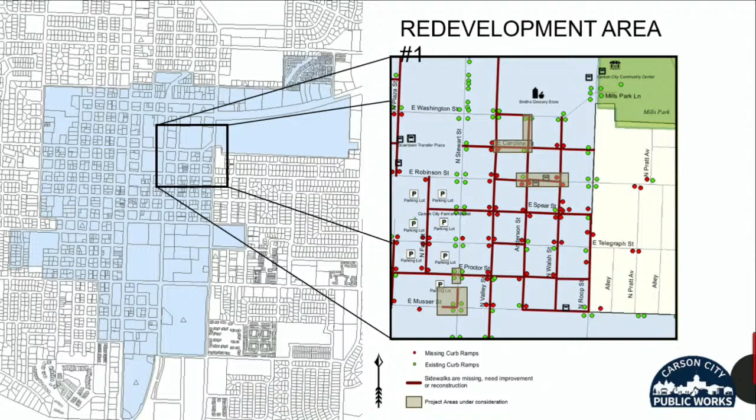On this graphic showing the streets in the downtown area, pretty much the Stewart Telegraph area, red dots are missing curb ramps, green are existing curb ramps but not necessarily ADA compliant, and red shows sidewalks observed to be missing or needing improvement or reconstruction. There's a lot of red, and that's what we're working on: reconstructing and adding facilities to add connections to community services in this area. The grayish brown boxes highlight the project areas under consideration, and we'll zoom into each of those in this presentation.

Starting here at the northwest corner of East Musser and North Stewart Street, you see the existing condition: a deteriorated sidewalk, curb and gutter, non-ADA compliant, with grade slopes some exceeding 10%. ADA compliance requires 1.5% to 2% for sidewalks, so this is not pedestrian friendly for all users.

On the proposed design side, these civil 3D renderings show what the improvements will look like: flattened sidewalks that are ADA compliant, a ramp into the Mangia Tutto restaurant, a type 1 drive access exit that complies for pedestrians and wheelchair access, and a landscape buffer to collect roof drainage into the curb and gutter. There's also retaining curb to adjust grades to the patio at Mangia Tutto — lots of little improvements to make this retrofit work.

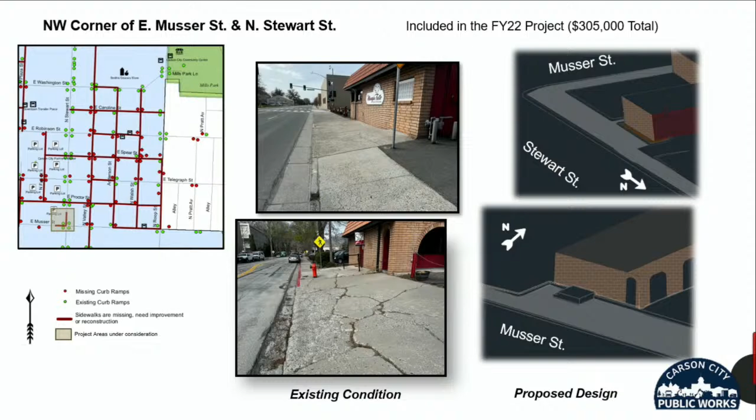The next area included in this fiscal year 22 project is Anderson Street between East Caroline and East Washington Street. In the existing condition there's a deteriorated valley gutter, no curb ramp, and no sidewalk connecting to Smith's grocery store. We'll be adding a new curb ramp and sidewalk, an important connection for residents to get up to that grocery store.

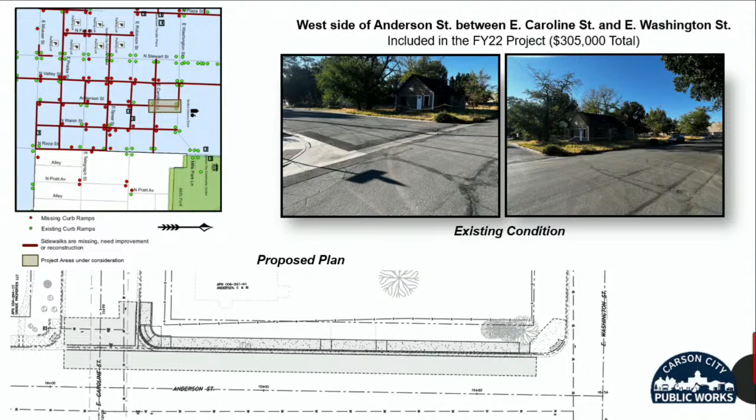We have a few items here we're calling bid alternates. This fiscal year 22 project is currently out to bid, and the last two areas I showed are the main portions — our base bid. These bid alternate areas are ones we hope to construct and have design and construction plans for, but depending on what the construction bids come back to be, they may or may not get constructed this fiscal year.

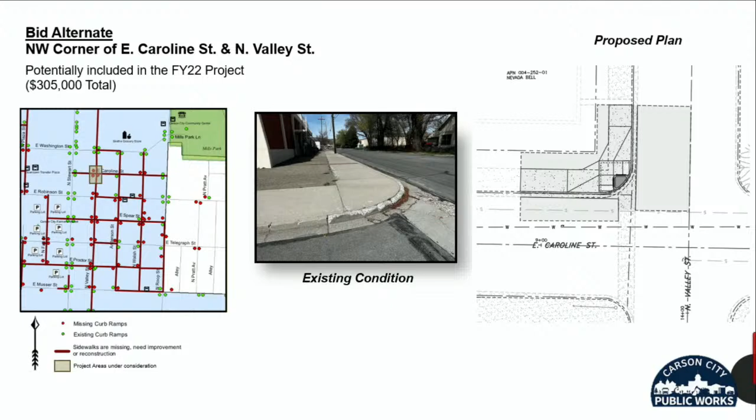The first bid alternate is on the northwest corner of East Caroline and North Valley Street. You'll see no curb ramps, a deteriorated valley gutter, and sidewalks in rough condition. This is also a very important connection between these hotels and residences and Smith's grocery store, so we'll be putting in linear ramps and a nice connection that will be much more pedestrian friendly.

The last bid alternate for fiscal year 22 is the west side of the North Stewart and East Proctor intersection, just north of the Mangia Tutto restaurant. These ramps are non-ADA compliant, with valley gutters in rough shape and steep slopes. We're looking at putting in ramps that allow connectivity with the crosswalk on North Stewart, as well as continuing that accessibility.

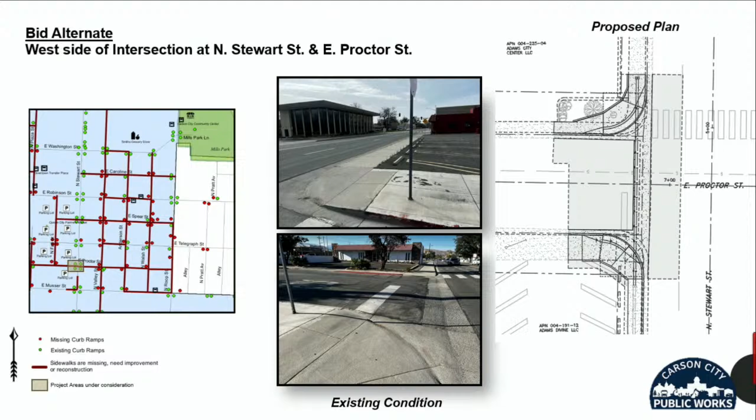That fills out our fiscal year 22 projects. Looking forward at fiscal year 23 money, as Randy mentioned, we're proceeding with an FTA grant of $180,000 for areas with connectivity to bus stops. With the two bus stops on East Robinson Street, we're going to be doing lots of curb ramps, sidewalk connections, and bus stop improvements.

We'll have $180,000 for that FTA grant with a 20% match we'd like to use RACC funds for. We'll have an extra $155,000 left over, so we'd like to include sidewalk and ramp improvements for East Caroline Street to the north, along with any fiscal year 22 alternates that weren't able to be constructed. We'll see how that plays out as the bid opening happens soon.

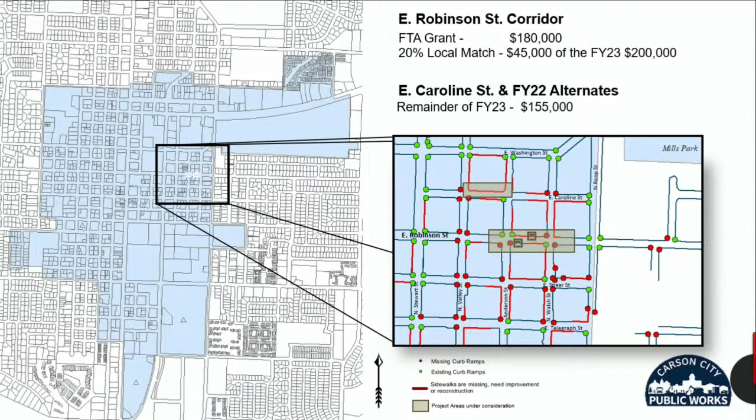Moving on to redevelopment area number 2. This is, as Randy mentioned, a CDBG project that the city received funding for. There was a budget shortfall, and it was decided to be a good use of funds for RACC to contribute to this project. Unfortunately, due to supply chain shortages and the construction environment, we were unable to construct this project last year.

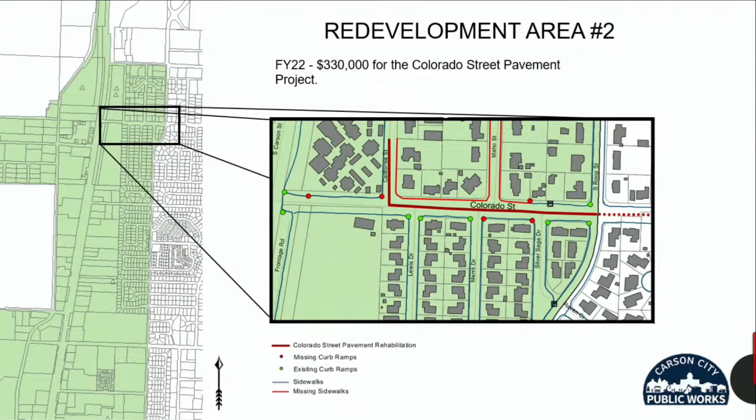A little summary here, next steps. So the fiscal year 22 project, construction is expected to begin this fall. We do have it out to bid. We are hoping that we receive favorable bid prices, but we'll find out soon. The fiscal year 23 project is in design, and construction is expected for summer 23.

For redevelopment area 2, that's the Colorado Street pavement project. That project, as I mentioned, is being rebid, with construction hopefully in spring 23. So Randy, do you have anything else to add? No, I think great job.

I just wanted to mention bid alternates. If you're not familiar with how they work, I'll briefly discuss it, because we threw that term out there and I'm not sure if everyone's familiar. We're having a hard time right now with the way construction's going, estimating prices as well as we used to. We used to have it down to probably the closest dollar, and we'd be able to tell you exactly how many lineal feet or square feet of something we could lay out. That's become very challenging lately, and we're hoping it's normalizing soon, but it's still in flux.

So what a bid alternate allows us to do is design something and put it out to bid, but tell the contractor that it's price dependent. So if they don't give us favorable prices, then that would not be included in their awarded work. Essentially what we're trying to do is include as much of the design and construction work as we can with the money that we have, without letting any money fall left on the table.

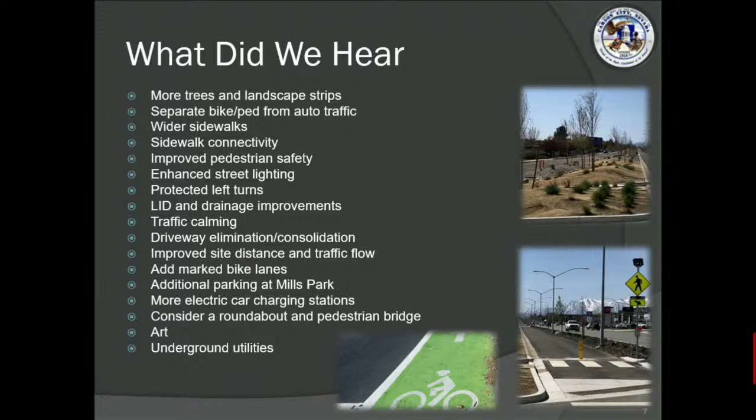I am the project manager for the design consultant helping the city deliver this important project. I'm going to talk through the steps we went through to get a preferred alternative for the corridor. We developed a feasibility study, investigated the existing conditions, developed and evaluated alternatives, and that led us to the preferred alternative for the corridor.

Randy touched on the project goals a little earlier. For existing conditions, we needed to consider the existing right-of-way width, as well as the existing features out there now. There's a lot of multi-use paths and sidewalks today that we're hoping we can connect to, as well as lighting and the travel patterns of both pedestrians and auto. We also considered public feedback and traffic operations.

A traffic report was prepared, which I'm going to talk about in more detail later. And then the city's existing plans and policies, such as the 2050 Regional Transportation Plan, the General Master Plan, the Unified Pathways Master Plan, and more.

So what we did was break the corridor into four segments: North Carson to Stewart, Stewart to Roop, Roop to Saliman, and Saliman to I-580. The reason we did that is the corridor really transforms from west to east - it's hard to do one size fits all through the corridor. The speeds increase, the volume increases, the width increases as you get closer to the freeway.

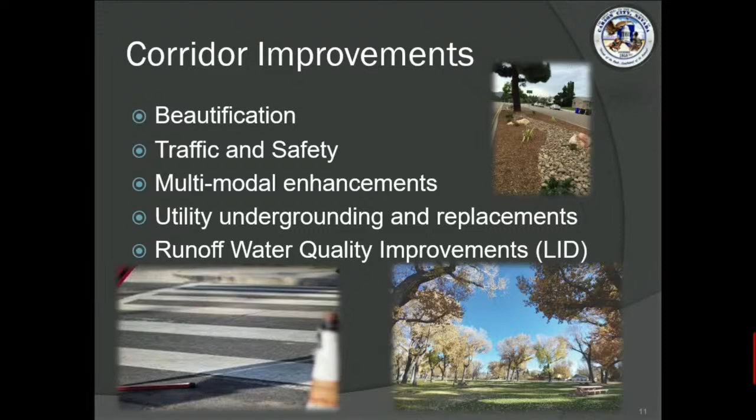So the preferred alternative throughout the whole corridor includes beautification, traffic and safety improvements, multimodal enhancements, as Randy mentioned, utility undergrounding and replacements. That's not just because they're unsightly, but because many of the poles are blocking the sidewalks, and it'll be very difficult to get our ADA clearance without removing the poles. And then runoff water quality improvements will be installed within the landscape areas.

This shows the preferred alternative from North Carson to Roop Street, and this is looking east towards I-580. You'll see our walking figure - not called a walkie guy, walkie dude - basically the guy walking east down the road to show the direction our cross sections are in.

From North Carson to Stewart Street, we are going to have dedicated bicycle lanes in each direction, as well as a wide sidewalk separated from the road with a wide landscape strip. You also see on this map potential bus stop locations. The Jump Around Carson Transit line is going to be expanded through here - eastbound will potentially go from Carson to I-580, and westbound from I-580 to North Roop Street. We've identified locations and will be working closely with the city's transit department and planning department to identify where those stops are going to go.

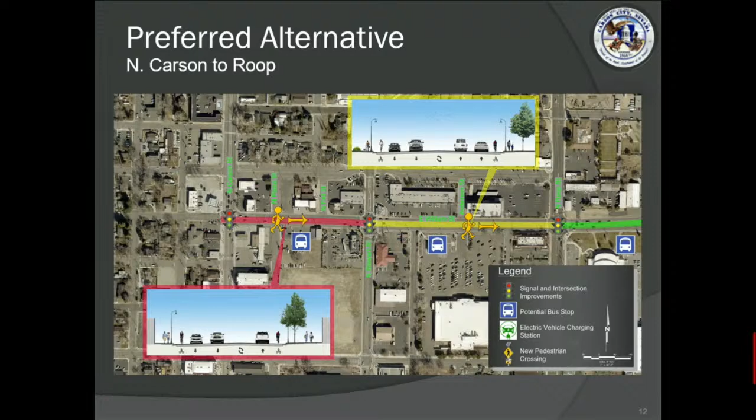Between Stewart and Roop Street, we also have dedicated bicycle lanes, as well as sidewalks and landscape area. This is actually the most constrained area in the corridor - it's got the smallest amount of right-of-way, plus some buildings that are pretty close to the edge of the road. So we won't be able to get as large of a landscape strip as between Carson and Stewart Street, but we're going to maintain existing landscaping where we can, and enhance where we have room.

From Roop to Saliman, the roadway gets much larger. In this area, we're able to put in a buffered bike lane, which means we can have a 3-foot separation between the cars and the bikes. That's been shown to provide a better experience, not only for bicyclists, but for automobiles as well.

This cross-section is at Mills Park, where we're going to be enhancing the parking that's there for Mills Park, as well as adding electric vehicle charging stations in this area, and landscaping wherever we can.

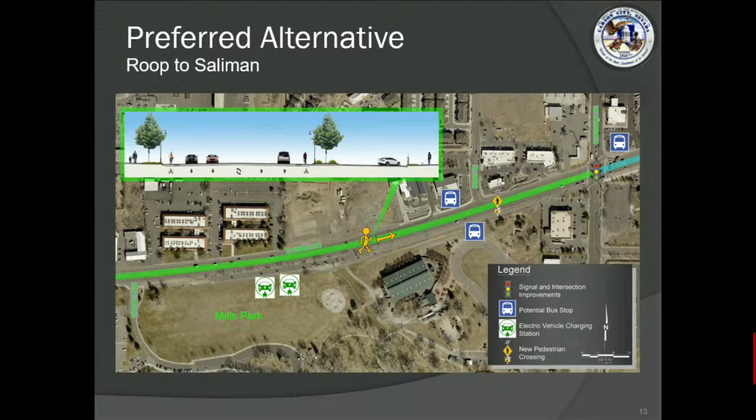From Saliman to Gold Dust West, we also have enough room to put in the buffered bicycle lanes, as well as landscape area, which is going to separate the multi-use paths and sidewalks from the travelway, which is more comfortable for pedestrians when you can be separated from the travel lanes.

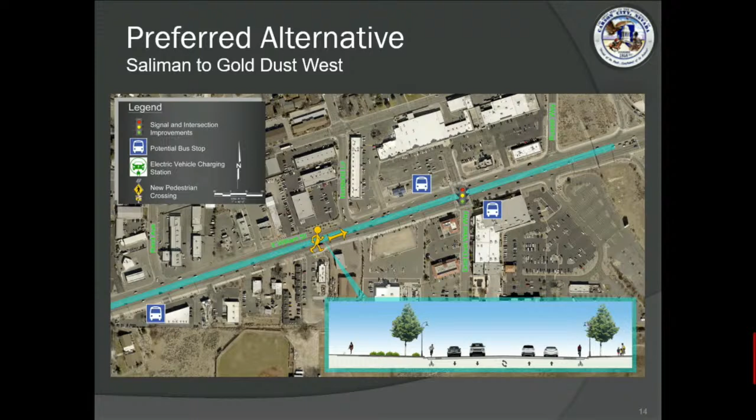A traffic study was performed as part of our technical studies, and they analyzed the morning, afternoon, and midday peak period for years 2022, 2030, and 2050. The traffic report identified a number of deficiencies that's going to happen in the future during those years. To mitigate for those deficiencies, as well as to make space for the other uses in the corridor, there's going to be a number of improvements put into place. This is a summary of the key traffic changes and improvements.

From Carson to Stewart Street, we're going to be reducing the eastbound lanes from 2 to 1. At the Stewart intersection, we're going to be adding a northbound right turn lane. At the State Street intersection, there's recommendations for an addition of a crosswalk with a PED flasher system. There's a lot of pedestrians that cross right there. They will also have what's called a pedestrian refuge in the middle where they can stop if they need to.

In the future, it's recommended that the southbound left turn movement from State Street gets eliminated. We're still looking at the timing of that and when those improvements will be put into place, whether or not they'll be put in place as part of this project or potentially a future improvement that the city can make when it gets closer to that year.

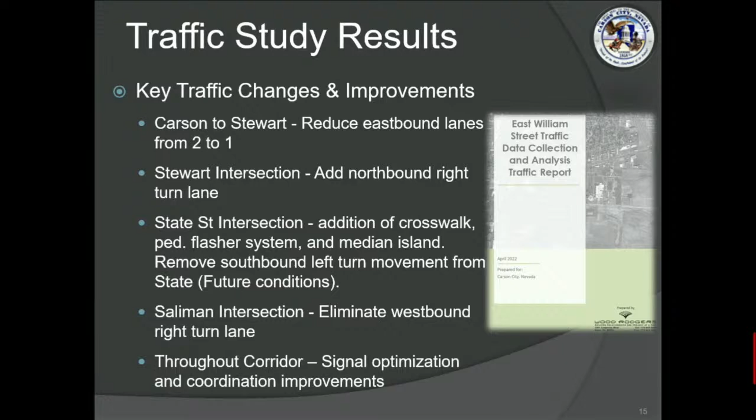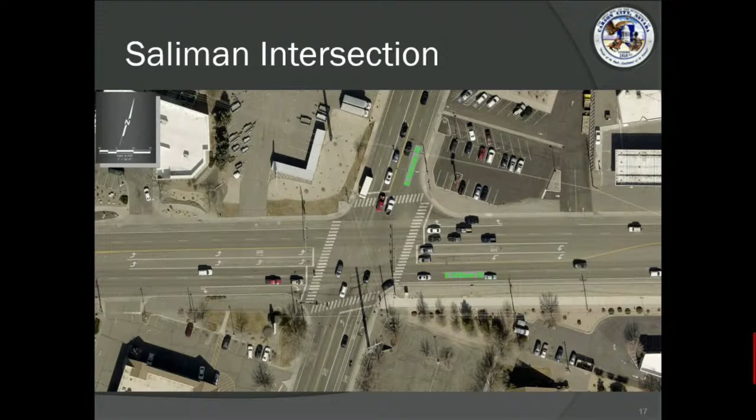This is a picture of the Saliman intersection, showing it as existing. This is showing the changes, and we're going to highlight what's actually happening. There's a lot going on in this intersection. Starting from right to left, you'll see that we're removing that right turn pocket that would go northbound on Saliman. We're able to adjust the curb lines, which shortens the pedestrian crossings.

We're going to be able to put in buffered bike lanes in both directions, and remove one of the left turn lanes going eastbound and then north onto Saliman. That allows us a little bit more room on the south side of the road to put in the bike lanes as well as directional ped ramps, which will provide more pedestrian storage. I know this is an intersection that gets a lot of pedestrians. We'll also put in signal timing modifications, and increase the left turn storage lanes onto Saliman as well.

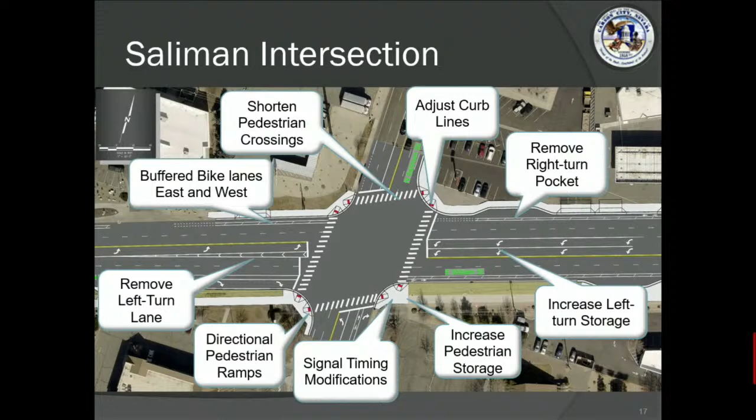And with that, I'll turn it over to Darren.

The project team's been pretty busy over the last several months, and that's going to continue over probably the next year. We've finished up 30% design and are working towards 60% design. Along with that, we've been talking to the oversight agencies being FHWA and NDOT and developing the environmental document, as well as discussing right-of-way acquisition and other related needs. Our goal is to have 60% design complete by December of 2022, and final design finished up in summer of 2023, with construction beginning in the end of 2023 or early 2024.

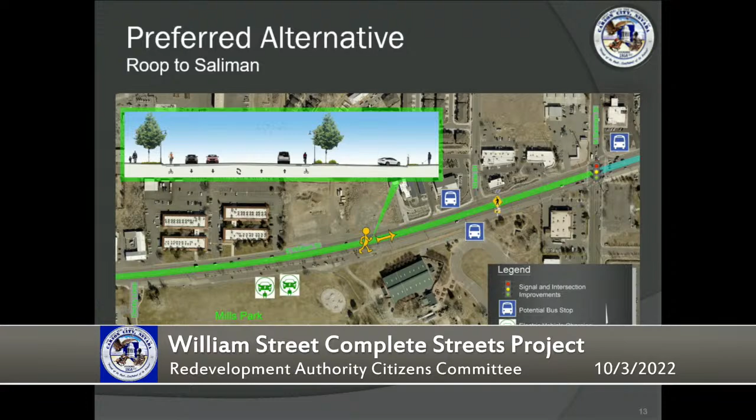I have a couple of comments too as I'm looking at this. You did not go on up to Gold Dust West - is that because it hasn't been designed yet? Because I have a couple of comments on that. So the work essentially east of Saliman is pretty minimal - it's mostly striping, changing lane width configurations, buffering widths, the inclusion of bike lanes in that area, but there's not a ton of aesthetics or sidewalk work because a lot of that area is already completed. So we're focusing most of our financial needs further to the west.

Well, the one comment I have is we have a very expensive multi-use athletic center there that you cannot get to easily if you're going east at all. So there's not going to be any design to make it easier to get to, so you don't have to take - what's the name of the street just beyond? You have to go on the other side of the freeway on Lompa Lane. Yeah, so I mean it was really meant to be a tourism attraction as well, to get tournaments or whatever there.

And I don't know how, if you do not live here, in fact, the people who live here now don't know how to get to it when you're coming from the east.

So that is not part of the design? Correct, at this point that has not been included in any grant packets or any information. I would think that if you were going to do something, it would be now.